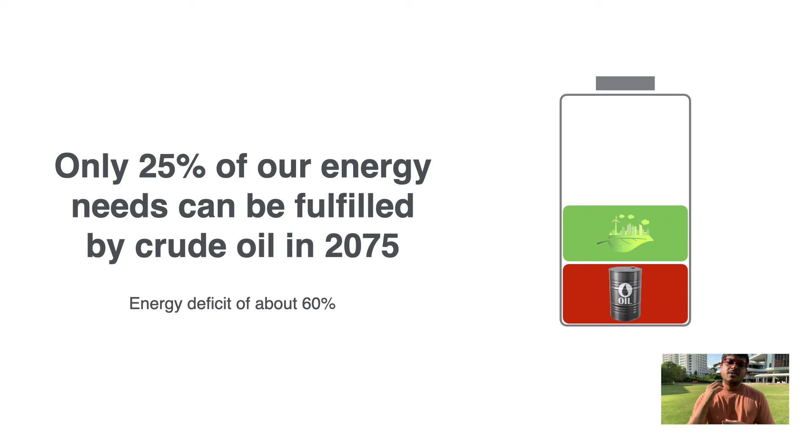The goal or the motivation that is driving this project is that the energy demands of our world are clearly increasing and the majority of energy sources today are non-renewable in nature. Now, one untapped potential renewable energy resource is wave energy harvesting. But harvesting energy from waves is an extremely challenging task.

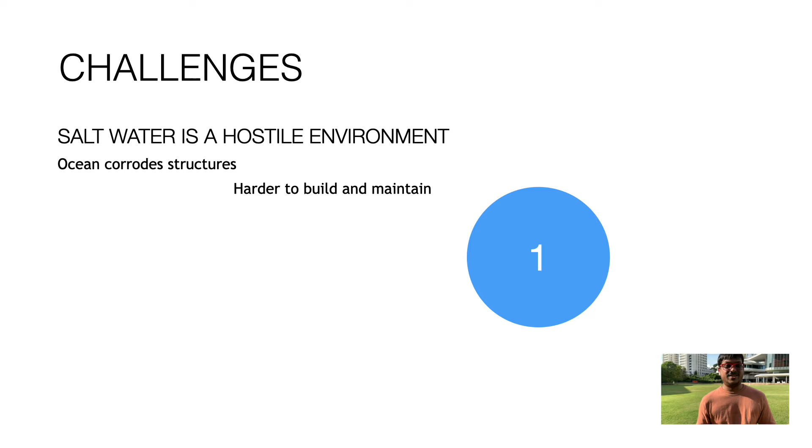Salt water is an extremely corrosive environment, and it makes maintenance and building of structures extremely difficult. We also have to minimize our ecological footprint, and we need to come up with a system that can handle large unpredictability and variance in the wave energy that we're trying to harvest.

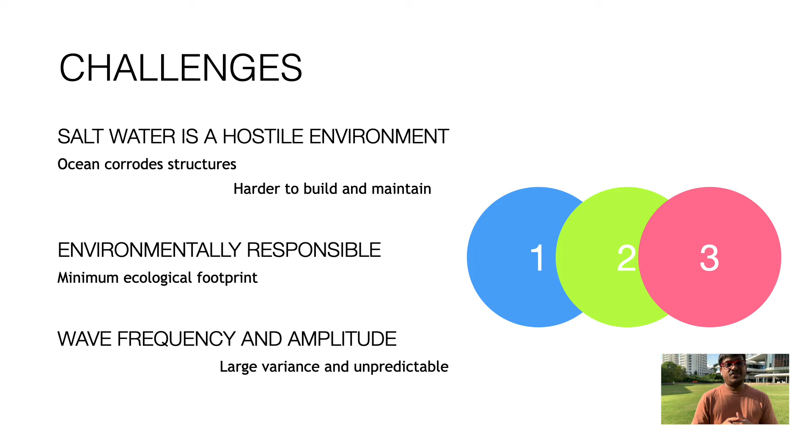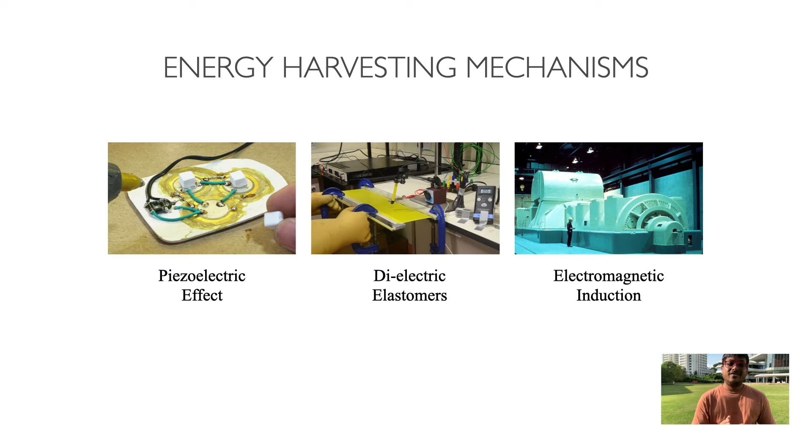Now, this ability to transfer kinetic energy into electrical energy from ocean waves requires a complete rethink of the transducer technology that we need to create. The transducer technology that we are using is dielectric elastomer generators. Dielectrics are simple materials that can act as capacitors in certain conditions.

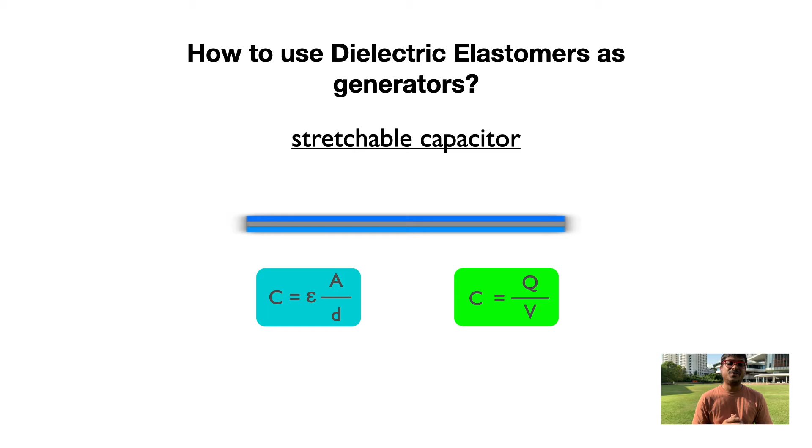And when we add the elastomer component, we can stretch these pieces of dielectric material, changing their capacitance. And we can use this property in specific configurations to act as a generator. These generators have been shown in the lab to have up to 90% conversion efficiency of mechanical into electrical energy.

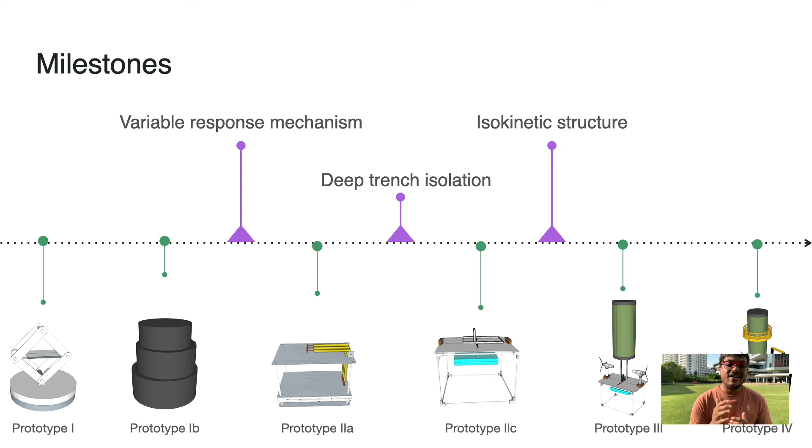My contribution to this project was to show that DEG-based wave energy harvesting is not only viable, but is also cost-effective. Over a period of 1 year, there were multiple iterative generations of prototyping. I was able to show that a DEG system can equal the performance of conventional existing systems. We started off in our first generation prototype with a simple 12-volt system that can power and flash an LED.

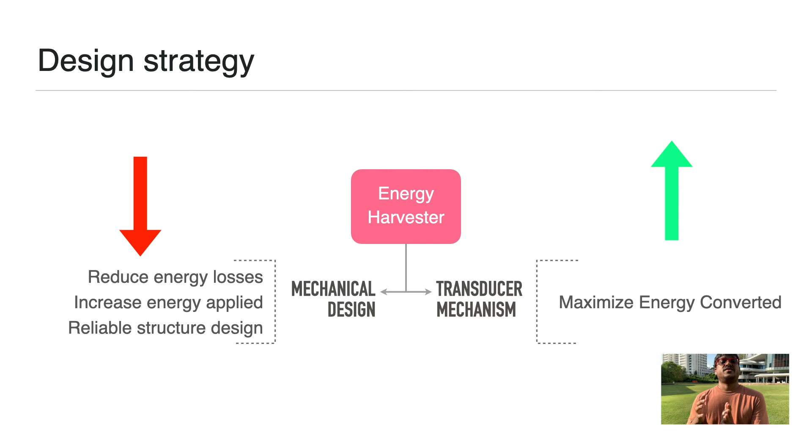Over the next few iterative generations of prototypes, we were able to introduce specific concepts, specific techniques and specific designs that together allowed us to improve the performance of the system. In the second generation prototype, I introduced something called the rack and pinion mechanism. And this was able to increase the operating envelope of a DEG.

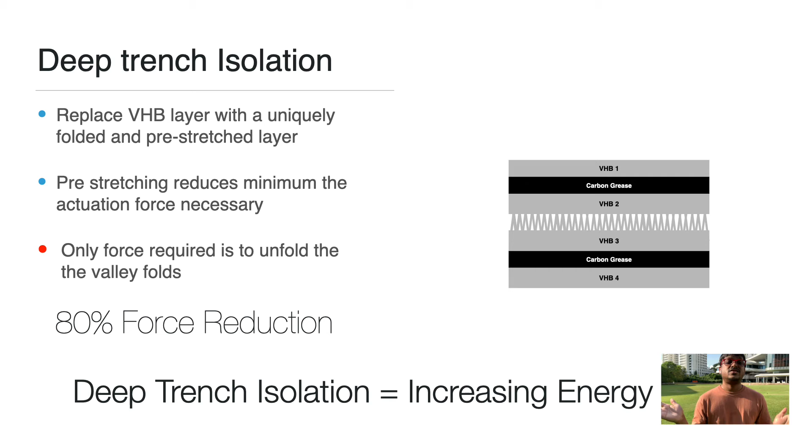In the third prototype, taking inspiration from the world of origami, I came up with a technique called deep trench isolation that allowed us to improve the performance of the system. At this point, we were able to break the 500 volt threshold.

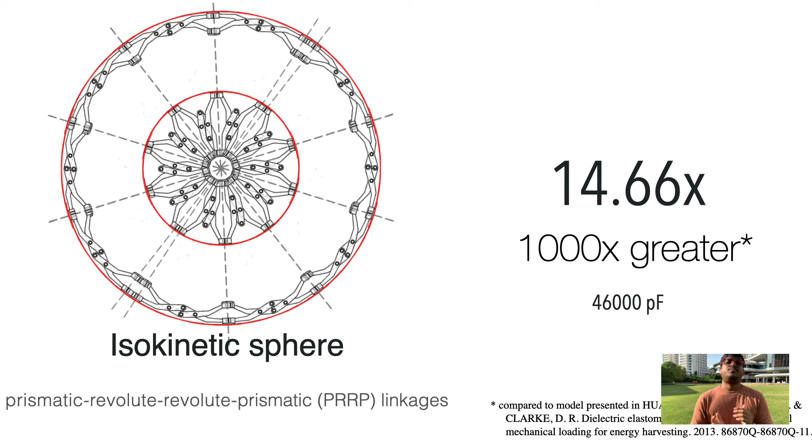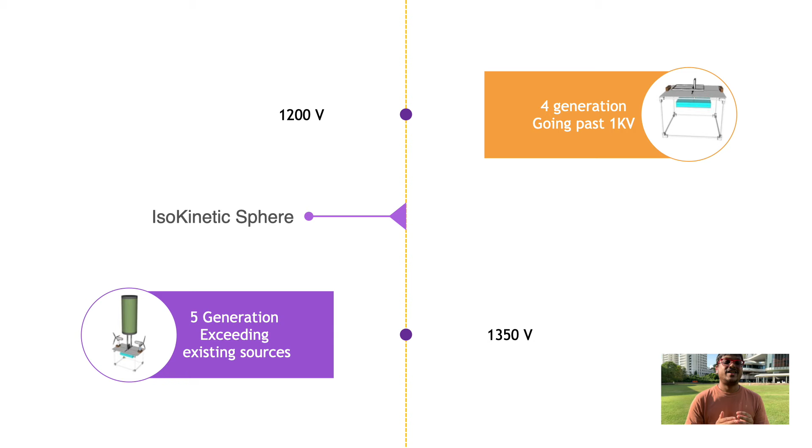And then, for the fourth generation prototype, I introduced a concept known as isokinetic sphere, which, coupled with the previous generational improvements, allowed us to cross the 1 kilovolt threshold barrier, and at 1.35 kilovolts, we were able to exceed the performance of any existing wave energy harvesting system.

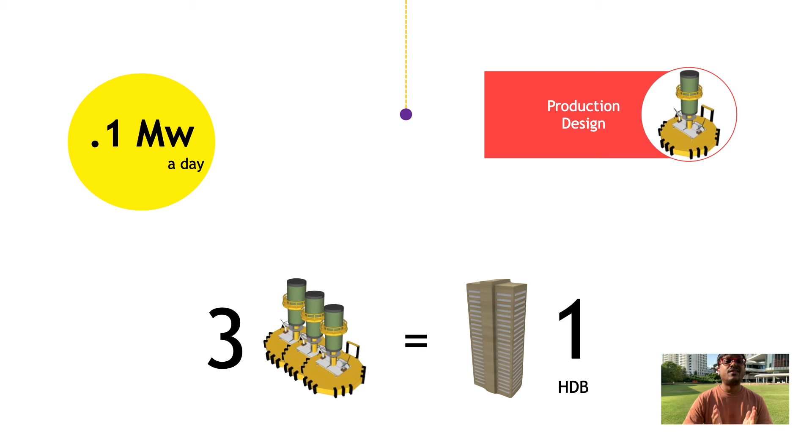And in our final prototype that is being tested and evaluated in actual operational conditions, we have seen up to 0.1 megawatts of energy being produced in a day. That means 3 of these tabletop sized systems can cover an entire HDB block worth of energy needs.

But for any transducer mechanism to be viable, it shouldn't be limited to just one use case. While I was looking at the macro level applications of this technology, the team that I was a part of was also looking at micro level applications of this technology to power pacemakers. We also have other team members looking at how we can exploit this transducer to power wearable technology. The future of this system is bright.

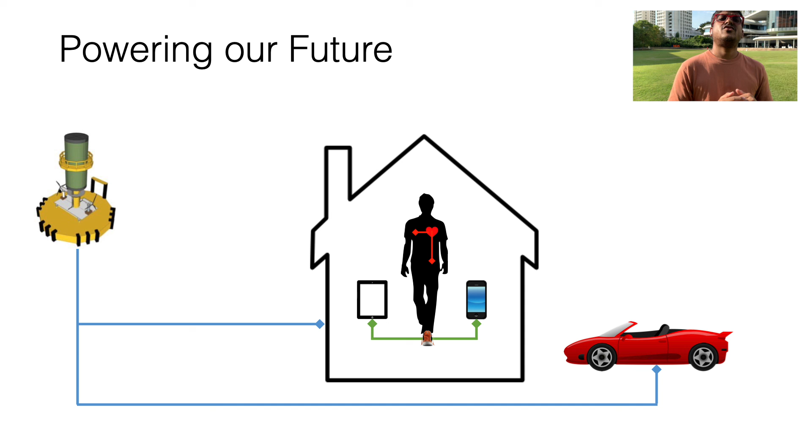It can power all the way from the micro scale of devices, and the future is indeed bright, both literally and figuratively.